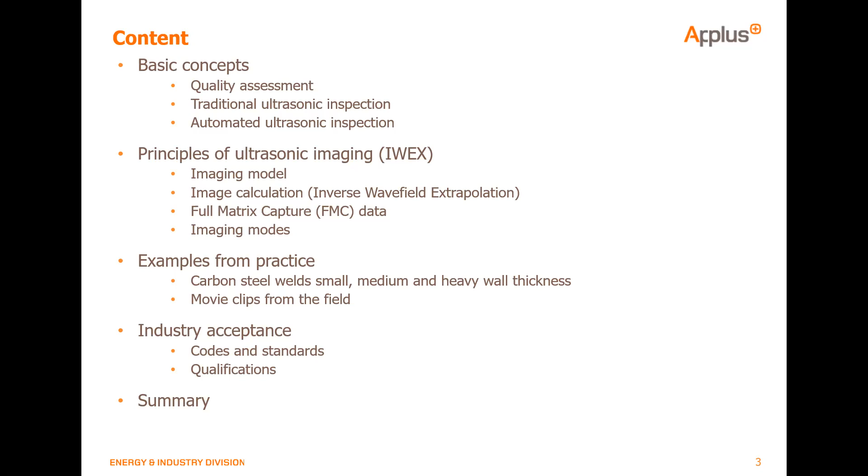If we, for example, look at other application fields, then we see that non-destructive testing in general has seen much progress. For example, computers are more powerful, they are faster, storage capacity, and advances in that kind of technology enabled the development of ultrasonic imaging. So I would like to share with you some of the principles of ultrasonic imaging. My intention is to give you an appreciation of the benefits and a conceptual understanding of the differences between existing technologies and the new technology, which is IWEX.

Then, so much for theory. I would like to share with you some examples from practice. So the examples that I've prepared for you are from actual operational situations. As we speak, there are multiple different applications, but I would like to narrow it down for you a bit and talk about the applications in carbon steel.

So I would like to show you some examples of small welds with small wall thicknesses, medium and heavy wall thicknesses. And also, I would like to share with you some video clips where you can actually see the inspection strategies in action.

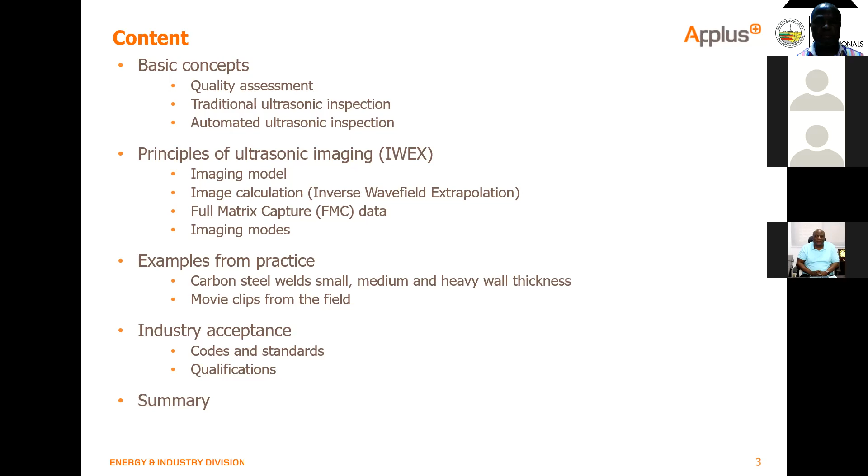But first, let's talk about the quality assessments of welds. Obviously, the main purpose, which is very important, is that we check the integrity of the welds. And why should we do that? Well, because if welding practices are not optimal, if welding practices are poor, that can lead to different kinds of indications, different kinds of defects in welds, and those welds then form a weak spot.

So what can happen is if the pipeline is under pressure, or if the pipeline, for example, is under a fatigue scenario, could be due to wave motion, could be due to landslides, and any sources that can put stresses on the pipe, then the girth weld is typically the weakest spot and will lead to failures.

So what kind of indications are we talking about? Well, there's just a few here that you can see. There's the lack of fusion indications, the porosity, lack of cross penetration. There are different kinds of indications, volumetric and linear, that can actually be in the weld, and those are the kind of indications that we're looking for during the quality assessment, because those types of indications form the weaker spot.

Also, as a bit of background, the pictures that you see here are obviously from real indications. In the United States, the Department of Transportation keeps records of failures. So these situations are actually from real life, and I would like to stress the importance of the quality check of the girth welds, because, as said, these are just some examples, but they can lead to catastrophic events, health and safety threats, but also obviously significant environmental and economic damage. So this is what it's all about.

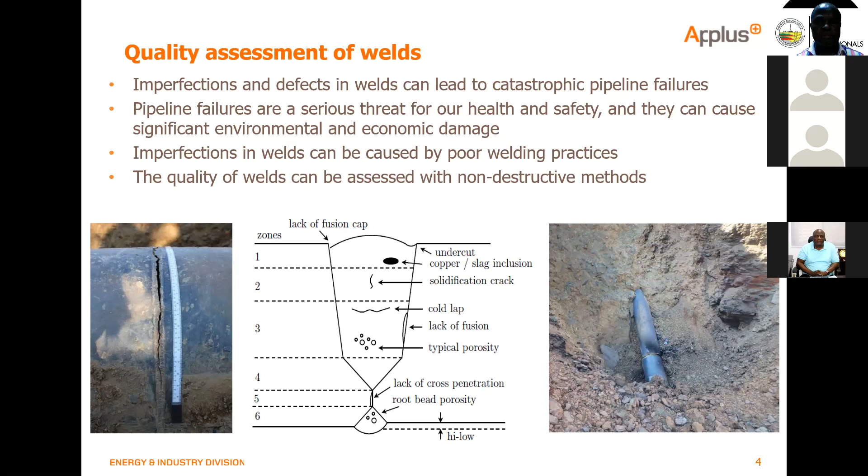And let's talk about some traditional ultrasonic methods. So we are very much aware that we need to check the integrity of the welds. In earlier days, and actually still, the quality of those welds can be checked by means of radiography. However, radiography has some fundamental limitations. One of the limitations of radiography is that it's hazardous. We are working with X-rays or other hazardous sources. So then traditional ultrasonic inspection offers a benefit because it's not hazardous for the human being, and it's a very efficient way to find indications.

So when it comes to traditional inspection, you can basically say there are two different categories. You have the pulse echo method and the TOFD method, and basically the principles of these methods rely on the fact that ultrasonic waves can propagate through the material, they can propagate through metals, they can propagate through water, and then in case there is a defect in the weld, we see that ultrasonic waves reflect at that indication, and that means that we can receive that reflection.

So the pulse echo method basically relies on ultrasonic waves that are focused, much like a laser pointer. It's a very small directional beam, and the benefit obviously is that you can detect indications, but it does require that small ultrasonic beam to be pinpointed exactly where the indication would be.

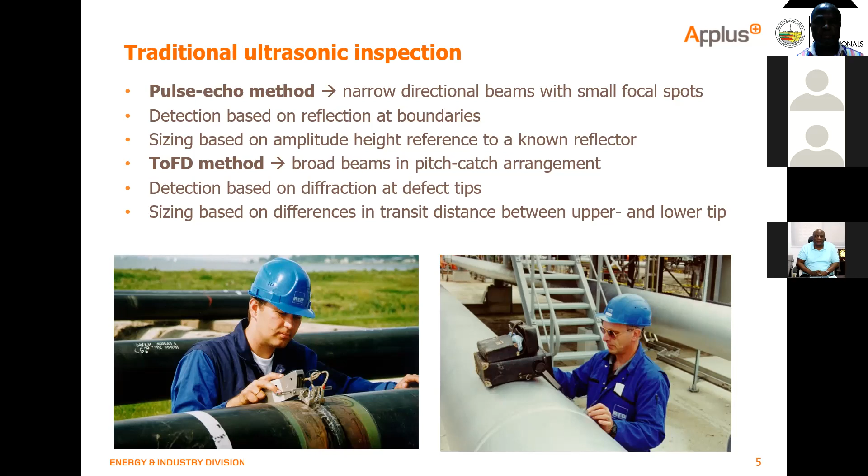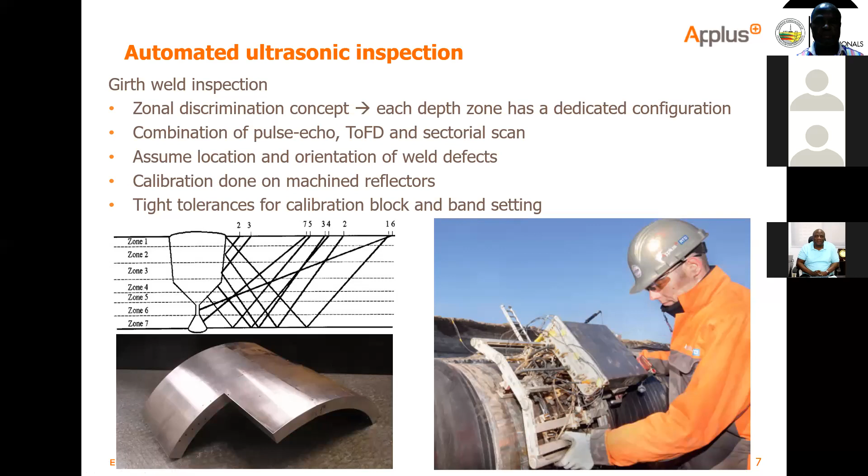So to share with you some of the AUT data from this automated ultrasonic setup, here you can see a typical strip chart, and again, I think it is fair to say that it does require some expertise to do the interpretation. Having said that, by no means would I like to disqualify this technology, because at the moment it is the most renowned technology. There are codes and standards, and the technology has proven itself many times, and it's common practice.

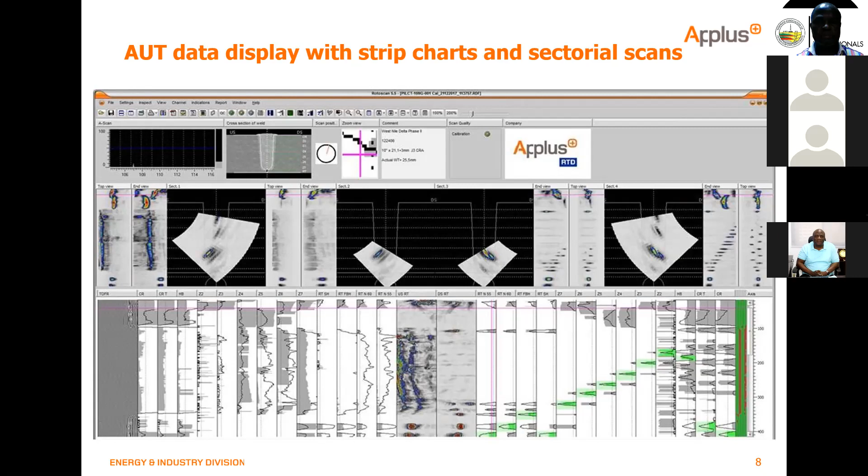And if we are trying to find indications with directional beams, that means that we actually assume what that orientation would be. And that doesn't always have to be the case in practice, because real indications may be irregular, they may not have the orientation we expect, and that has a consequence on our inspection performance. Likewise, variations in geometry: sometimes the wall thickness changes, sometimes due to the welding there is high-low, or a large cap or root reinforcement. Those geometrical features are something we cannot control before we do the inspection.

Likewise, the probe: if we have a guiding band in an automated sense, then that setup is very hard to control. So as a consequence, the data presentation comes in many different displays, A, B, C, D, S-scans, whatever letters we have in the alphabet. It doesn't necessarily make the interpretation easy. And sometimes different inspectors come up with different results, although they have exactly the same scans. So sizing of defects often requires test pieces, and the setup requires these calibration blocks.

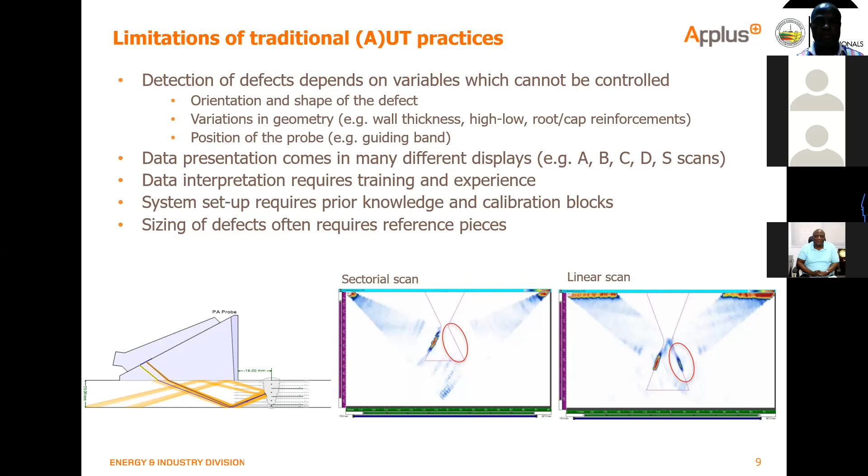So having set the scene, having talked about the traditional inspection methods, the pulse echo method, TOFD method, automated ultrasonic inspection based on the zonal discrimination, now I would like to make a bridge towards the improvement that we would like to present. So first I would like to introduce some of the principles.

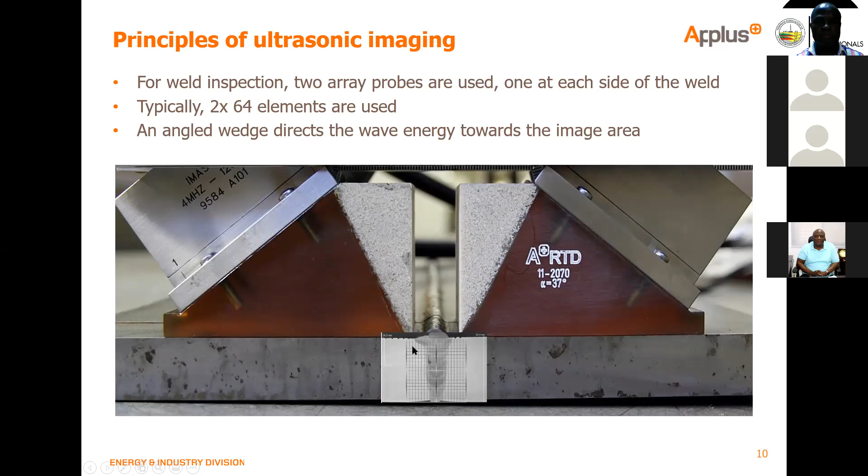Okay, so now we have defined our setup. I'm trying to share with you some of the principles again and try to explain how it works. I can understand that this might be a bit complicated, but I think, again, the intention of this presentation is to obtain a bit of an appreciation and to share with you some of the conceptual differences.

Okay, so here again, there's a setup, and basically how we can create an image is that it requires a model. What do I mean with a model? Well, basically we have 2 wedges. We have a wedge angle, we have the position of the array, and we have defined our image area. That image area has pixels.

And one thing that we know before we do the inspection is we know this model. So that means that we know what this wedge angle is. We know what the vertical or horizontal index is. We know our element pitch. We also know the location of this pixel. So basically, this model is known before we start the experiment.

Now, one thing important to mention is it does not require any knowledge about the weld configuration, right? It also does not require any pre-knowledge about orientation of indications. The only thing that it requires is the model itself. And it does require the definition of this pixel space, this image space. Now, these elements that you can see here, they can be used as sources and receivers.

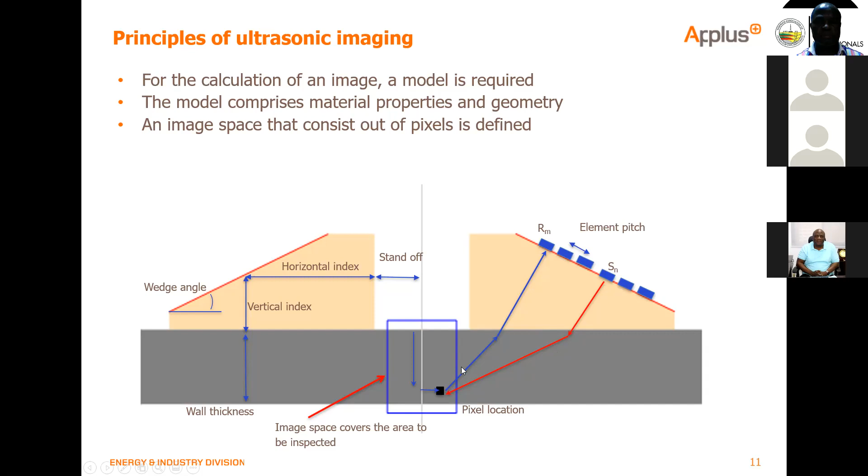But in the event that at this pixel location an indication is present, then obviously there would be a sound path from this source to this pixel location to the receiving element. If nothing is there, then I would receive nothing. But if there is something, then I know that at a certain time, which I can calculate, I would receive something that corresponds to this pixel.

So basically, to make it a bit simpler, I have this illustration, and here you can see what I mean. If I fire this element as a source, and I create an ultrasonic wave, that ultrasonic wave is basically spherical because this element is very small. Then the ultrasonic wave travels through the material to this pixel location. And again, if there is an indication at this pixel location, you would get a reflection that travels back to the array. And you can see that if I listen with all these elements, then I start to receive responses.

Now this element, for example, because it's closest by, it will have the soonest response, the earliest response, and also the strongest response because it's closest by. Now you can understand that, for example, this element, if it's a receiver, then the travel time is simply longer, and I see later in time a response. And you get these particular patterns. So for example, if I would have another pixel, maybe here, then this pattern would be a bit different.

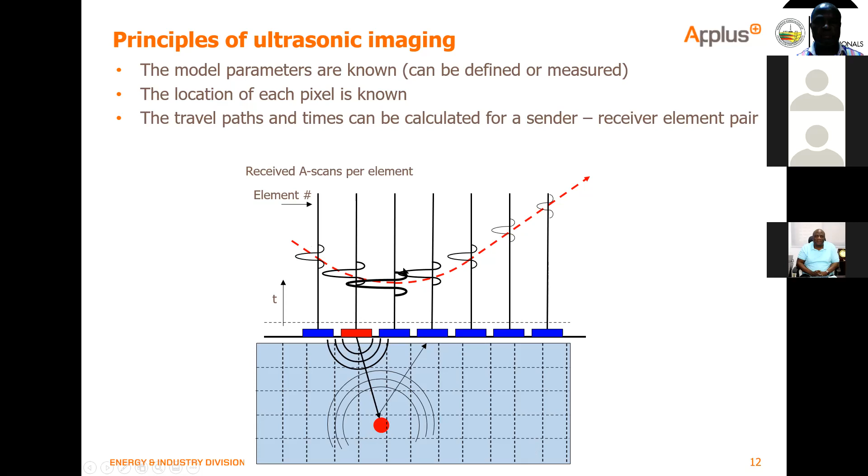So basically, this type of pattern, I always like to refer to it as an ultrasonic fingerprint. But in essence, this ultrasonic fingerprint is nothing more than ultrasonic responses at a certain time. Now again, because I know my model, I know that if this pixel has indeed an indication, then I know at what time this response would be. Now that gives me the following opportunity. If I know the travel time, that means that I can compensate for it.

And this is also where the term IWEX comes from. It stands for inverse wavefield extrapolation. And basically what it means is that I have this pattern, which is nothing more than travel times. I can calculate which travel time it would be for this pixel. And then what I can do is I can basically inverse the clock and shift all amplitudes back to time 0. And that is what I can do for this pixel.

So if I do that, and indeed there was something here, then that means that all my responses would line up nicely at time 0. And then what I do is I just sum all these responses together, and then that response is assigned as a value to this pixel location. Now, obviously, in this illustration, I have this element as a source and all the others as a receiver. And I can do the same process for this element as a source and all the others.

So basically what I can do is I can make combinations of sources and receivers. And if I have, for example, 64 elements, then I can take 64 squared combinations. And all those combinations are called a full matrix capture. Now, you might have heard about the term full matrix capture earlier, because I like to believe that the full matrix capture approach is one of the latest developments in ultrasonic technology.

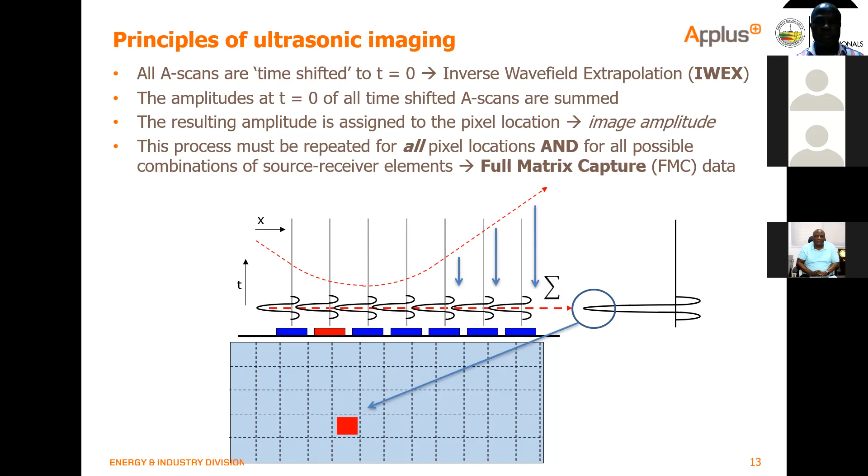So one of the things that becomes just a bit more complicated is that obviously waves travel not only directly from this element to the indication, but we also have a back wall that acts as a mirror. So basically, if you have a travel path from this element, there are multiple travel paths possible. So we have the direct arrival, for example, but there's also a direct skip arrival, or a tandem, or a skip arrival. And basically that means that this pixel location does not have one line in our fingerprint, but it has multiple lines in our fingerprint.

And by choosing our delay times, our inverse times, we can select which one we would like to have. And the reason why we would like to have that is because it gives us more information. It gives us information of the top of the indication, but also of the back of the indication or the side. So the use of multiple modes allows us to look at an indication from different sides. And because of that, it is possible to image an indication without knowing the shape up front.

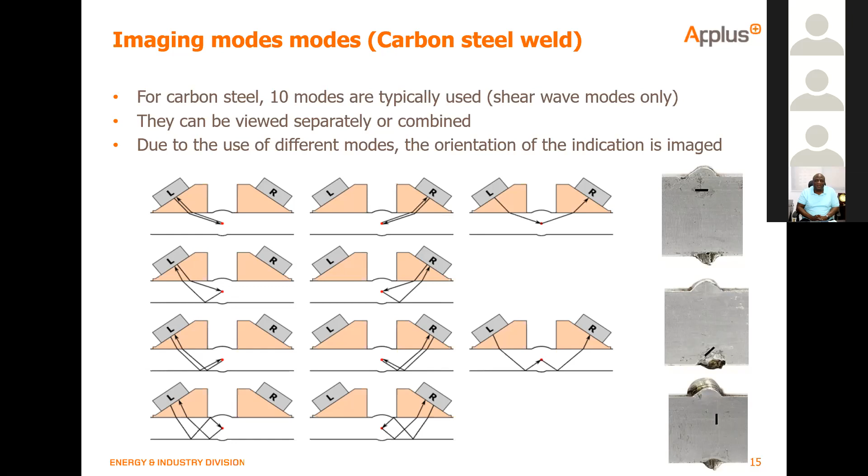So that was a lot of theory, I realize that, but just to summarize the conceptual differences between IWEX and traditional ultrasonic technologies. IWEX is based on an image reconstruction algorithm. So basically we have this ultrasonic fingerprint, and by the approach of inverse wavefield extrapolation, we are able to reconstruct the data into an image.

So the ultrasonic data consists of combinations of transmitter and receiver. So it's a full matrix capture data set. And that full matrix capture data set is really different from existing technologies. For example, the pulse-echo method, where we just have a laser-like kind of beam, or a phased array sectorial scan, where we have the same as the pulse-echo, but then it is, let's say, swiveled into a pie-shaped pattern.

The full matrix capture fingerprint is basically obtained by using an array, and then we apply the elements as separate sources and receivers. And that is, again, one of the conceptual differences. The outcome and the big benefit is that we have representative images in 2D and 3D, and we can also display those in real time. So that is so much about the theory.

Then I would like to share some examples with you from actual practical situations. We started the development with carbon steel. The reason for that is carbon steel is ultrasonic friendly, so to speak, so we have good signal to noise ratio. Again, I explained that we need the model. For carbon steel cases, it's very straightforward to predefine our model and to do the measurements.

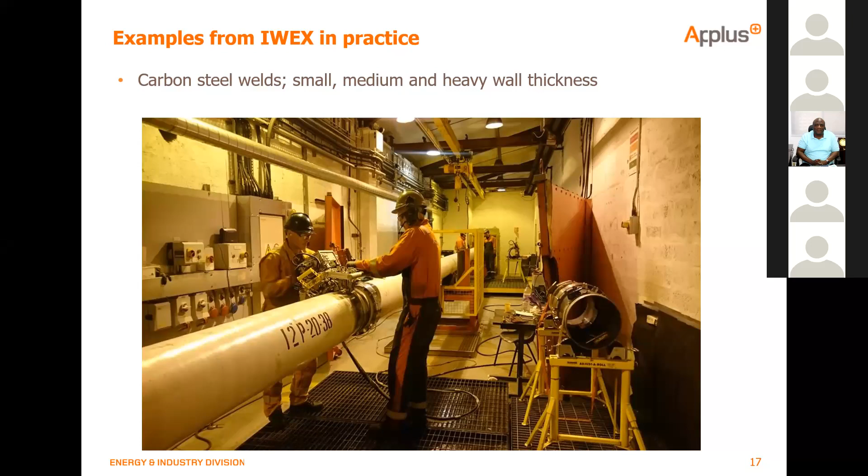Now I start with the medium wall thickness range, and the reason why I start with the medium is because it is the most common in our practice. So what is medium? It's typically between 12 and 35 millimeters of wall thickness, carbon steel. Those are not hard numbers, so there's always a bit of a transition area. But commonly we do the inspection with a 4 megahertz probe.

So here you see some examples of actual indications in welds. The concavity, as you can see, is a machined, artificial defect, so it's not a natural defect. The defect that you can see here as a lack of fusion indication is more representative. And if you compare this indication with the actual scan, then you can see very nicely the back wall and the front wall. You can see the indication.

And what I like about this illustration is that you can see the location, that means the depth position of the indication. You can see the orientation of that indication, and you can also obtain the size from this indication. Now also you can see, for example, the geometry. This particular example has a small high-low mismatch, which you also can see in this image.

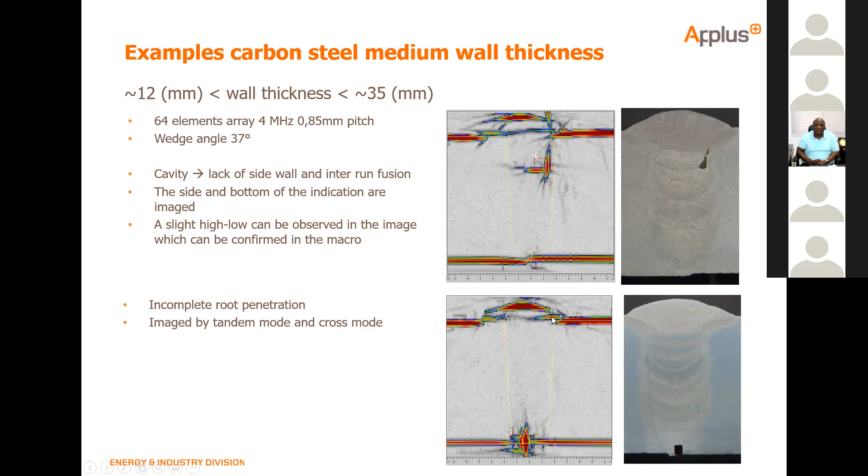Now here are two more examples. The previous example was a lack of fusion and a root concavity indication of a narrow gap, a J-prep weld. Here there are some examples of the V configuration, and here again you can see very nicely the cap geometry. It also reflects the shape. So basically the root reinforcement, the different passes of the weld, but also again, you can see that there's a nice lack of fusion indication, which has the orientation following the weld bevel, virtually one-to-one.

And again, I think it's fair to say that the interpretation of these pictures requires less than traditional ultrasonic methods, because you can just see the weld and you can see the indication, the depth, the orientation, the height; everything is almost 1-to-1 comparable with the macro section, with the cross section of the weld.

So then this is an indication of cluster porosity. The cluster porosity is typically in the volume. Now it's interesting to see that the image amplitude is a bit lower, and that is because the pores in a cluster porosity scatter a lot. So the ultrasonic energy goes in all directions, and that means we might miss some of the information that we would like to have to get a good contrast, because it does not come back to our receivers.

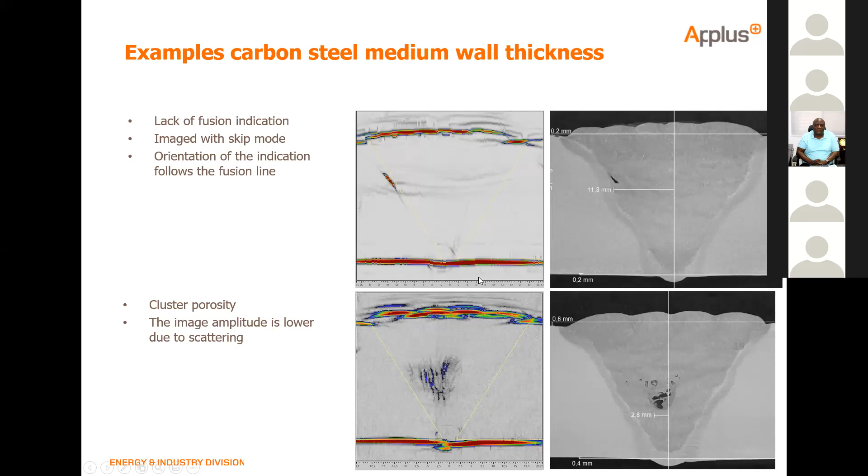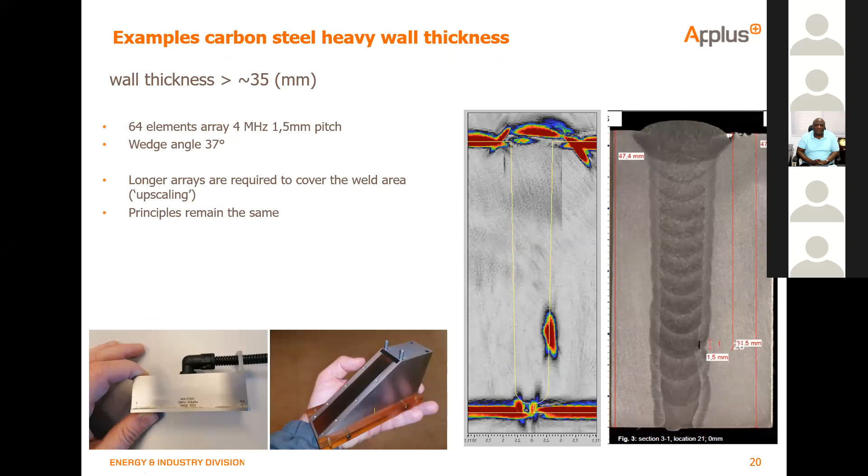So I would like to move forward to a heavy wall thickness. I think the thickest we did in practice was about 60 millimeters, so quite heavy. Basically, if you work with a heavy wall thickness, you'll have to scale up your setup. That means you'll need different types of probes and different types of wedges. But nonetheless, the principles remain the same.

Here you can see the scanner. Typically the scanners that we're using can accommodate small wall thicknesses, small being, let's say, 5 millimeters, all the way up to 60 millimeters. And you can see here again the guiding band. And here it's very nice to see that this indication in the root is again imaged correctly, and the size is basically 1-to-1 comparable to the actual macro sectioning.

Having said that, it does require using the right setup. For example, if you would like to do an imaging inspection of this type of weld with a probe that is too small, it would not be possible to get this type of information. So it is important to use the right procedure and the right setup sequence in order to do this. So although imaging has a lot of benefits that I am happy to illustrate here, it does require the correct knowledge to apply it.

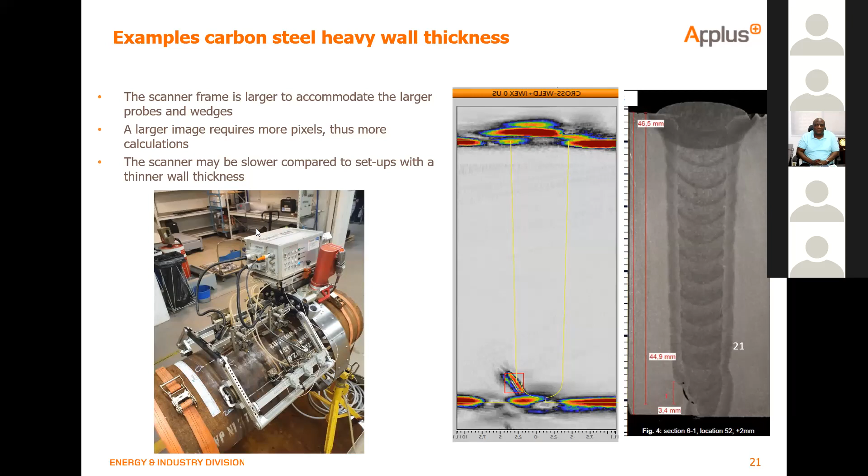So then I would like to move forward to the smaller wall thicknesses, still carbon steel. To be more specific, smaller means a wall thickness of 12 millimeters and smaller. I think the smallest that we did is around 5 millimeters for a particular kind of pipe. For that type of setup, we're using higher frequencies. Higher frequency means a shorter wavelength, and a shorter wavelength means that we can be more accurate.

Now, obviously, you can ask yourself, why wouldn't you use 10 megahertz also for the thicker stuff? In principle, that can be done, but it has some practical limitations. If you have a very high resolution, you require a lot of pixels. If you have a lot of pixels, the calculation becomes more time consuming and more intensive. And that can have a practical limitation, namely that your calculation goes slower.

So it really depends on the type of inspection scenario that you would like to address. We have done inspections in offshore situations, for example. Offshore situations means time is money, so the inspection time needs to be fast. In that type of scenario, you would like to tune your setup in such a way that you can still accommodate the cycle time of the girth welding process, so that you do not hold up the entire manufacturing chain due to the inspection.

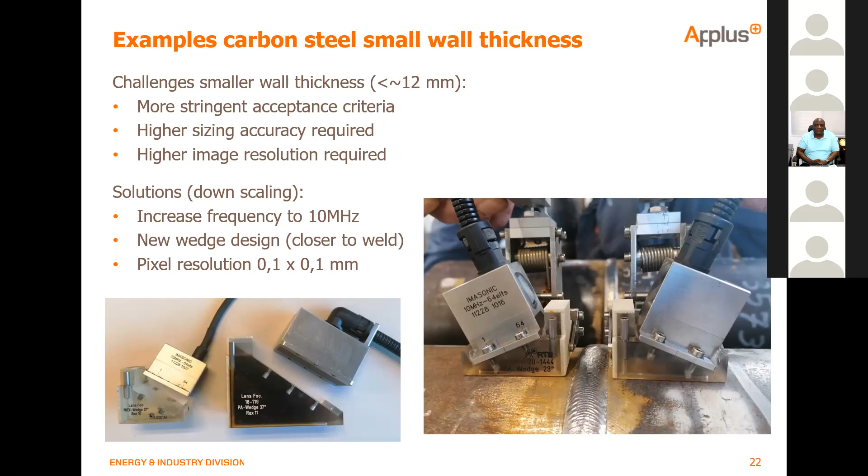So to share some examples again with you on the smaller wall thickness, and really you can see that the results are still maintained. So now we have an 8 millimeter small wall thickness, but the imaging of the indication is quite accurate. And I must say that for these smaller wall thicknesses, we have been able to size indications up to like 0.5 millimeter. That can be done very accurately. So it's quite impressive what the technology can do. Obviously, provided that you're using the right system setup, and the right frequencies and probes.

So also, having said that, some words about sizing. What you can do with the software is you can just simply draw a box around the indication, and then the software basically snaps to the edges of this indication, and then it'll give you the height size. So that means that the interpretation is also software facilitated, which in contrast to traditional ultrasonics makes it easier to do the interpretation.

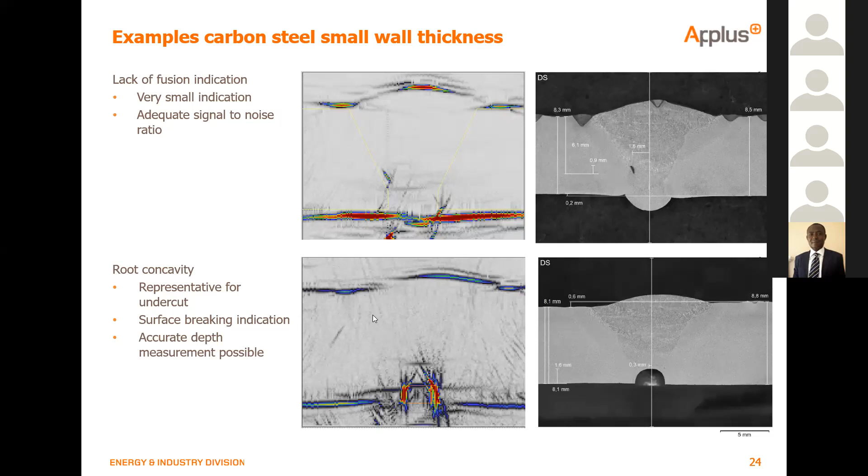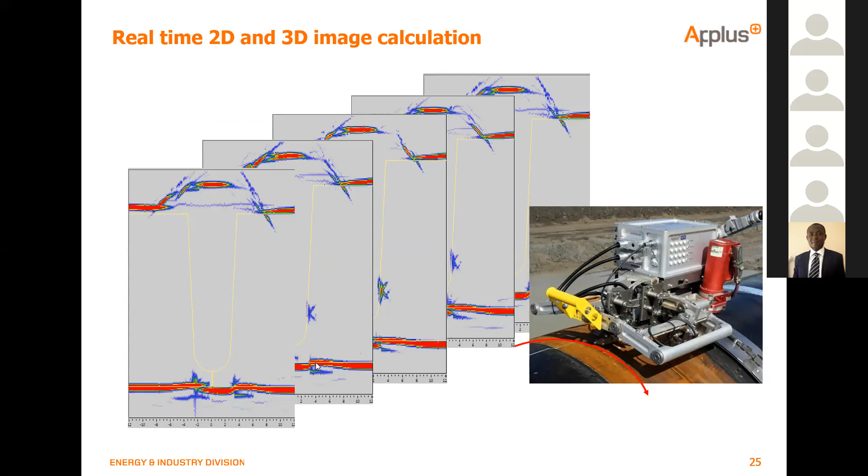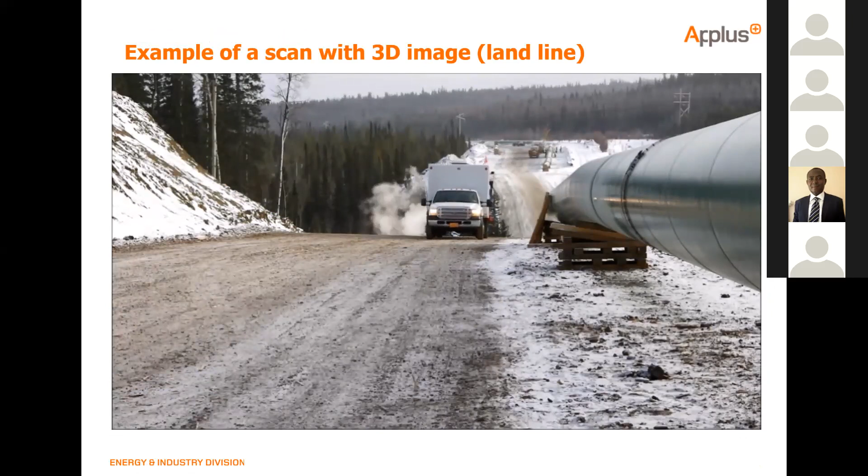So far, I've discussed 2 dimensions, but what I would like to share with you is that if you have 2-dimensional images, then because we have a scanner, we can actually merge these 2-dimensional images in 3D. And therefore, I would like to share with you 2 examples, 2 movie clips. This one was taken in Canada on a land line. I believe it was a 42-inch, and here you can see the guiding band of the scanner has already been prepared by the operator. Then the scanner with the ultrasonic electronics is mounted, and here you can see how the scanner moves. It's an orbital scanner, so it requires 1 circumference.

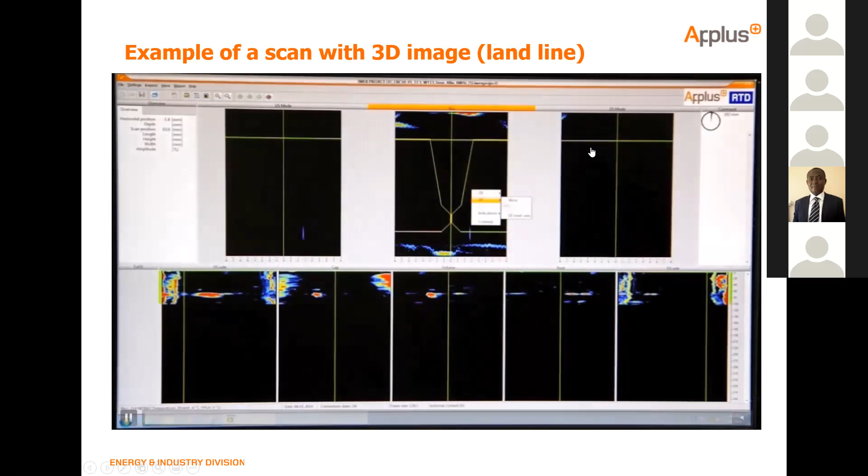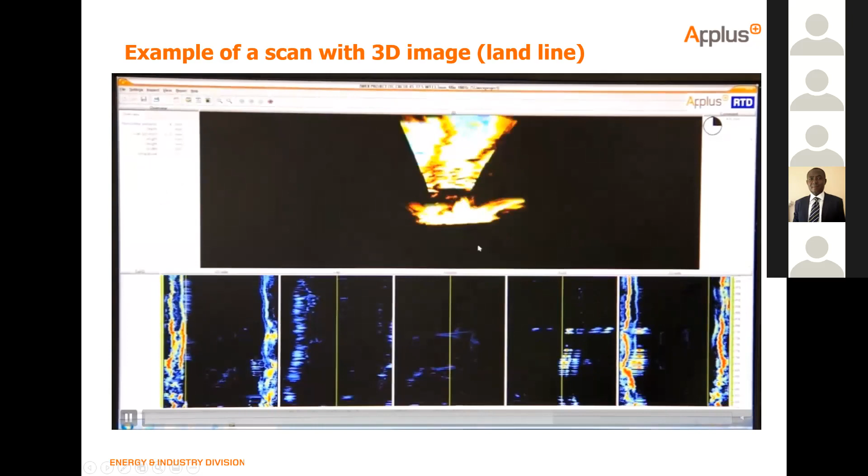Here you can see the 2-dimensional images, and then in real time we can switch from 2D to 3D, where you can have an actual 3D representation of the weld inspection in real time. So you can see the indication in the weld. Basically, the upper part is the cap, and the lower part is the root. If there's a lack of fusion indication, for example, then we would see that in between. And in real time, you can rotate it to analyze it. And also, it is recorded. So at the end of the inspection, we have a record which you can analyze later on, and you can make a report.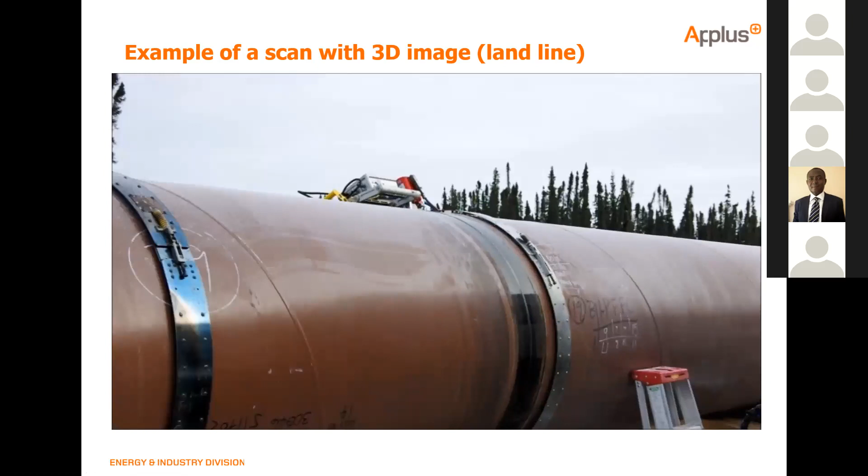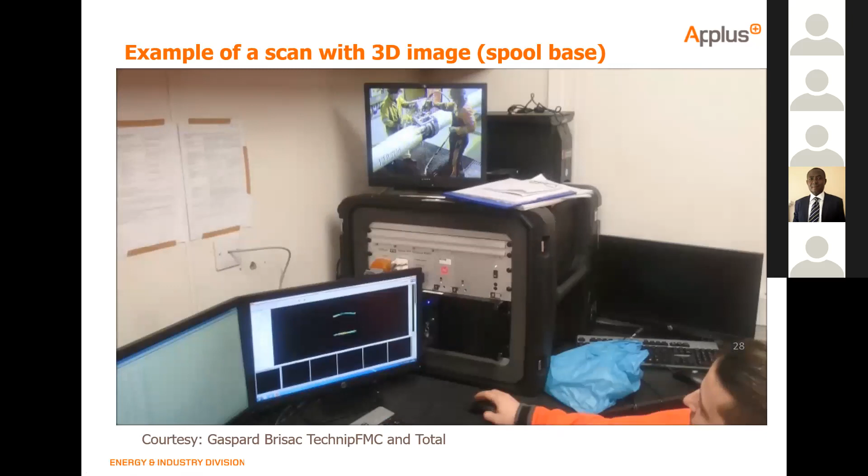So this video that I would like to share with you is on a spool base. The previous was on a landline. The video that you see here is more representative for an offshore scenario, whereby the operator sits in a cabin, and there are videos to the firing line. And here you can see again, it's all real time. It's a very nice example of a lack of fusion indication, whereby you can see that the actual indication follows the weld bevel configuration.

The final example, this is also offshore. This is a bit of a different setup. This is a linear scanner, and this inspection was for the seam weld. So basically this pipe configuration was pipe in pipe, whereby there were two scales consisting of two girth welds and two seam welds, and also the seam welds needed to be inspected. So apart from the girth welds, it's also possible with this technology to do seam welds as well, but obviously it does require a bit of a different scanner.

So I got two more sheets, and basically those sheets are about the industry acceptance. Because everything is nice, we have a new technology, but it will only be important to use it once it's been accepted in the industry. So the full matrix technology, IWEX being a member of that full matrix family, is becoming more and more accepted. There are, as we speak, codes and standards being released, and this is all very recent. So we're talking about 2020, 2021. In the ASME code, there are some sections added covering full matrix capture, but also in the ISO. And I think that allows the use of the technology in the industry because there are codes and standards.

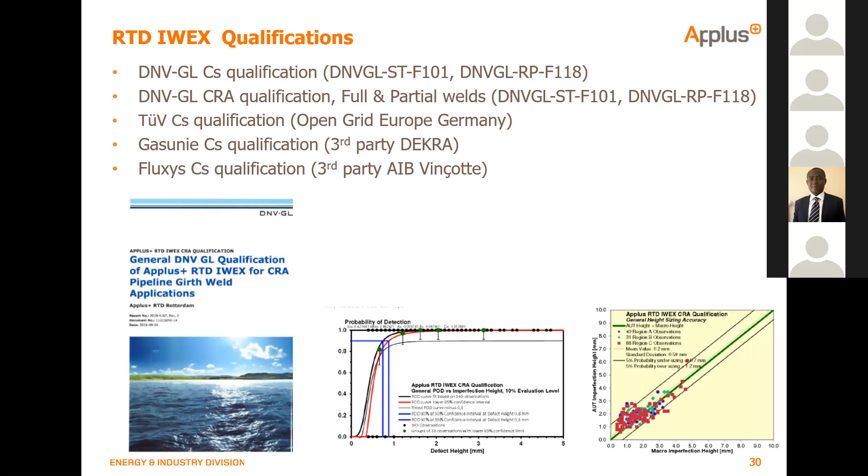So thereby I would like to conclude my presentation. I hope it was informative to you. There's already some words about the summary, but at this point in time, I think it's nice to open up the discussion, and therefore I would like to give the word back to the chair. And obviously I would like to thank everybody for their attention.

Okay, thank you, Niels. Thank you for this very incisive and very good presentation. It's very simple and very clear to me, and I believe it's also very clear to everyone. Quickly, I will just in 2-3 minutes give a quick summary of what you have said. If I go by my own definition, what you have just told us this afternoon is the testing and analysis for welding defects and discontinuities in pipeline without causing serious damage to the original part. That's the quick definition I will give it.

Your presentation is divided into about five sections: the basic concept, the principles of ultrasonic imaging, field examples, how it is accepted in the industry, and the benefits and summary. Under the basic concept, you enumerated the need for proper QA/QC of pipeline welds in order to avoid failures which can pose serious threats to our health and safety, and ultimately economic and environmental damage. You gave some quick examples of the pulse echo as well as the TOFD.

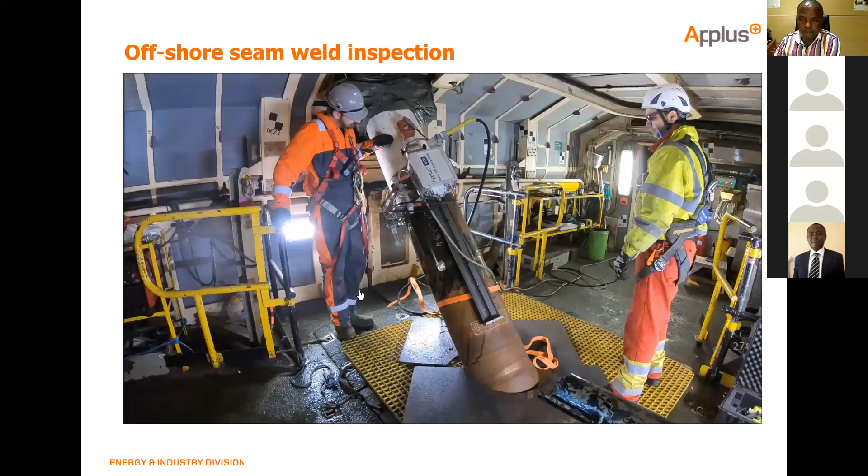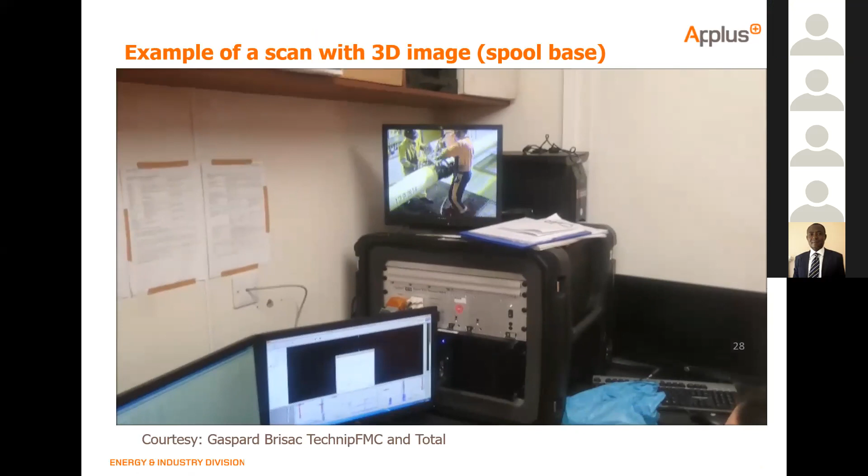The first one: the 3D image is breathtaking, but what was the thickness and scan speed for that particular scan shown in the presentation? Well, thank you for the compliment. I'm not sure which example you mean, maybe the one from this. But typically the wall thickness that we're dealing with is from 5 to typically 35. That is the typical range of wall thicknesses.

Then the inspection speed. The inspection of one weld ranges from 1 minute to a couple of minutes, and that depends also on the diameter. If you have a very large, maybe a 42-inch, then the weld is much longer, so it takes longer to do the entire circumference. However, the equipment was designed in such a way that it is faster than the welding. We understand the business requirements, which means that the inspection should not be on the critical path.

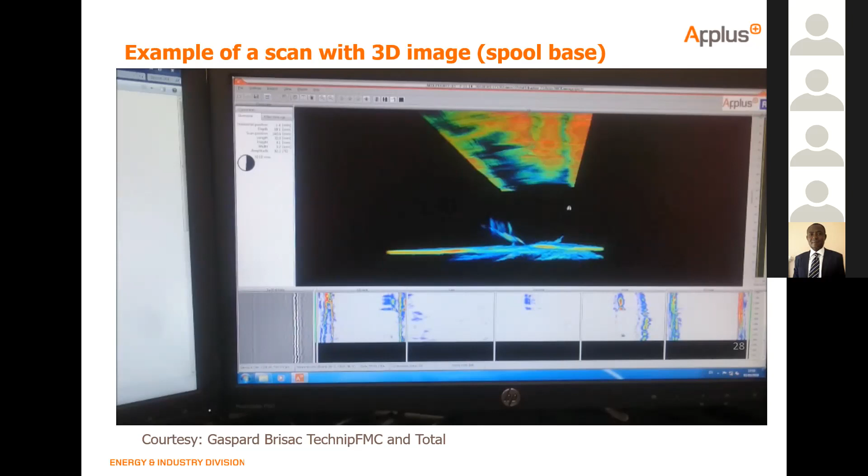So with all the examples that I've shown, the IWEX inspection is fast enough to meet the client's requirements in terms of cycle time. Is that sufficiently answered for the audience?

Hi, Gokul, do you want to just quickly unmute and give me a confirmation? Oh, yes. Okay. Thank you very much.

So the second one: can the FMC IWEX methodology be used on anisotropic carbon steel materials, that's thermomechanically controlled process steels, and have reliable examination results? The answer to this question is yes. The methodology indeed works with anisotropic carbon steels. However, it does require adaptations in the model.

Anisotropy basically means that the sound velocity in a material is not constant. For some materials that are manufactured by means of rolling, you get a layered structure in the metal, and that causes the ultrasonic waves to kind of bend. This bending effect, this anisotropy, is something that can be incorporated into the model.

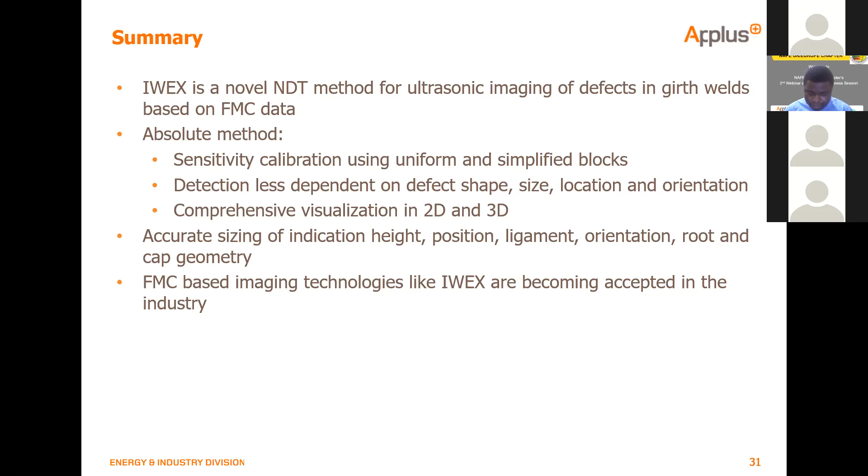So the minimum OD that can be scanned, I'm not sure if there is a minimum OD. It's more related to a practical situation. The minimum OD that we have scanned is about 4 or 5 inch. And that is typically depending on the kind of manipulator. So you would use chain scanners, smaller probes. Obviously, you would use wedges that are curved to accommodate the radius.

So it's not necessarily a principal limitation. It's more a practical engineering challenge that you need to address. So again, I would like to invite the person who asked this question to contact me, if he has a specific application in mind with a minimum OD.

Okay, then can super duplex steel be done? Can this be applied to in-service assets or only on CAPEX projects? Answer is yes. Super duplex is something that we've done before. I have to say it is more challenging because super duplex, especially the welds, have the property that the grain structure is typically coarse. So that means that ultrasonic waves attenuate and they scatter. There are good solutions to overcome those issues.

And when it comes to super duplex or duplex stainless steel, we have experience with that. So also for this type of application, I would like to invite the person who asked this question to contact me so that I can show some examples of that.